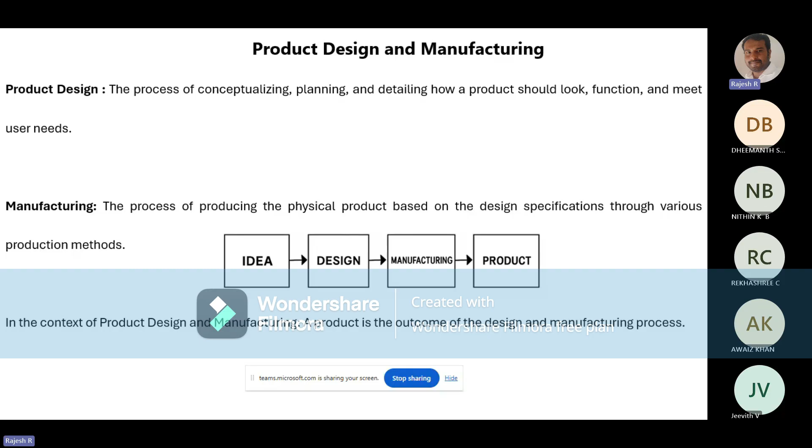One example I took was how the evolution of product design took place. Initially, the product design era started with the craft-based era, where parts were made by hand by skilled artisans. So design and production were integrated. Customization was high, but scalability was low. There were some constraints or disadvantages in the craft-based era, due to which the emergence of the engineering design era took place, after the post-industrial revolution.

In the engineering design era, a separation of design and manufacturing processes developed, with the introduction of standardization and interchangeable parts. Design became systematic, involving calculations, drawings, and specifications, and there was a rise of engineering disciplines, where different departments came into picture.

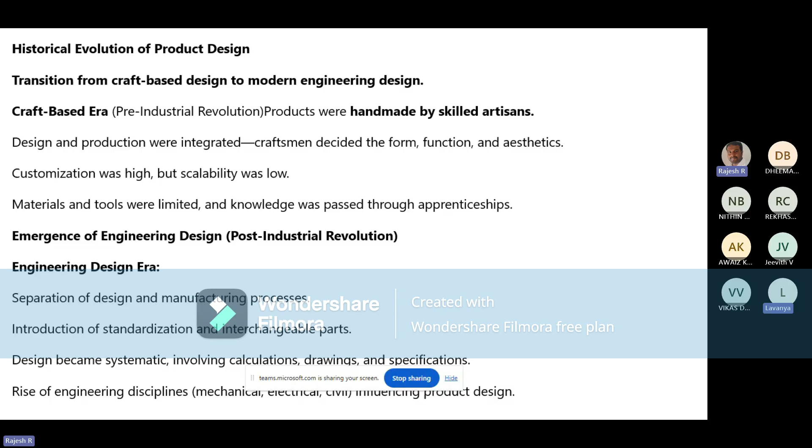I took an example of a handmade wooden chair for the craft-based system, where the artisan usually designs and prepares the parts himself, so a combination of design and manufacturing is present in this craft-based era.

Whereas when it comes to the engineering design era, you can come across different departments, like the designing department being separate from the production department. In the designing department, only the conceptualization of the part, how it has to be designed, and the detailed design of the part, what features should be there, all those things are focused on in the designing stage.

I gave an example of a smartphone, where it is designed and its specifications are represented, like screen size, battery capacity, camera specification, and all the detailed drawings come into picture in the designing stage. Whereas in the production stage, the components that come into picture, like material selection, are considered.

Material selection plays a very important role. There are different parts, like the body part, which needs to be prepared using aluminum material, and the glass cannot be prepared using metal, right? So a glass screen cannot be prepared with metal parts, so glass will be chosen as the material.

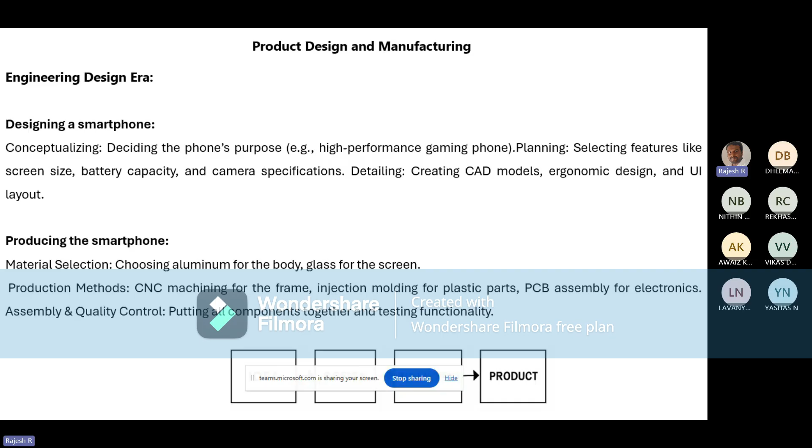So material selection plays a very important role, along with the different production methods that have to be followed in preparing different parts, like CNC machining being utilized for the frames, injection molding being used for plastic parts, and other things coming into picture, followed by assembly and quality control in the production of the parts. So that is what I have shown here.

And the types of product design were discussed, like design by evolution being one type, and design by innovation being another type. So what is the difference between these two?

When we consider design by evolution, I gave an example of a bicycle, where you can notice the first picture indicates the starting development of the bicycle, which came into the market in the 1800s or 1900s. As we come to today's year, like 2020 or 2026, most of the features remain the same: the wheels, spokes, the seating arrangement, the handles.

Only slight changes in aesthetics can be noticed in this upgraded version of the bicycle. So that is what we call design by evolution, where gradual improvement of an existing design comes into picture. As I've shown with the bicycle example, gradual improvement has taken place, rather than a sudden innovation.

So when it comes to design by innovation, I gave an example of two processes called subtractive manufacturing and additive manufacturing. In design by innovation, the design of the part refers to creating a completely new design approach based on scientific discoveries or advanced technology, rather than improving an existing design—meaning the technique you focus on is completely different. The best example of this is 3D printing, which I have shown here.

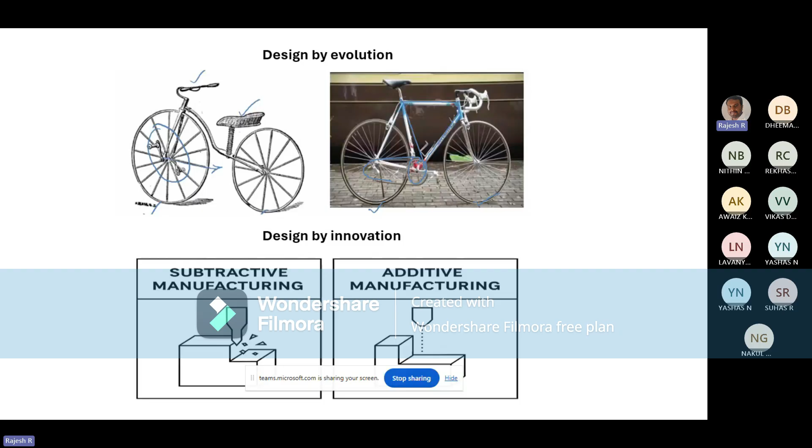Whatever parts are going to be manufactured, it's a completely different process. Additive manufacturing is where the parts are built layer by layer, whereas in subtractive manufacturing, a complete raw block is taken and the excess material is removed. So it is a subtractive manufacturing process. A changeover has taken place completely from subtractive manufacturing to additive manufacturing, and this is what we call a complete innovation way of design.

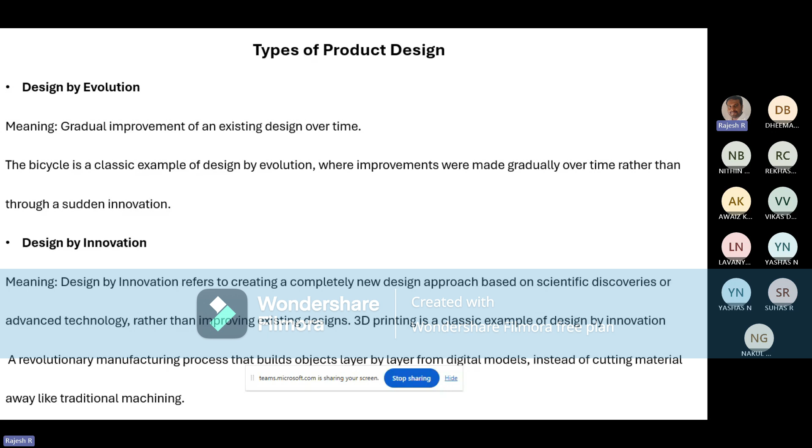These are the two types of product design which we discussed in the last class, and also we discussed about the production consumption cycle. Whatever product you are going to prepare follows a production consumption cycle. The important thing to focus on is the four steps: production, distribution, consumption, and the recovery stage. Whatever product you consider, it follows these four stages.

Production means creating the goods or service using raw material, energy, and labor. For example, a manufacturing car factory where using steel, electronics, and assembly process, the complete car will be manufactured. After the manufacturing process, the product needs to be sold, so a distribution process comes into picture, where the parts or cars that have been prepared need to be transported from one place to another and delivered to the consumers.

Shipping cars from factories to dealerships is one of the steps. After the cars have been sent to the dealerships, the dealers sell the goods to the end customers. The end user is the common people who buy the car, so that is the consumption stage. And the last one is the recovery stage - after the product has been utilized completely, it has to be scrapped.

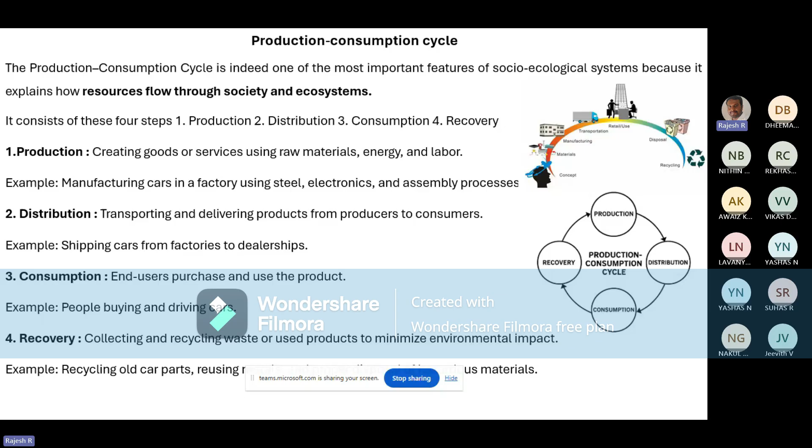Whatever collecting and recycling of waste we do, we call it the recovery stage, where the products will be recycled so that it does not affect environmental conditions. That is what I have given here: recycling old car parts and other things.

Different categories of information are used in the production consumption cycle. Information plays a very important factor in the production consumption cycle, because it flows in all the different stages of production, distribution, consumption, and recovery. If you consider the production stage, you require information - what type of information is required? It is technical and specification information.

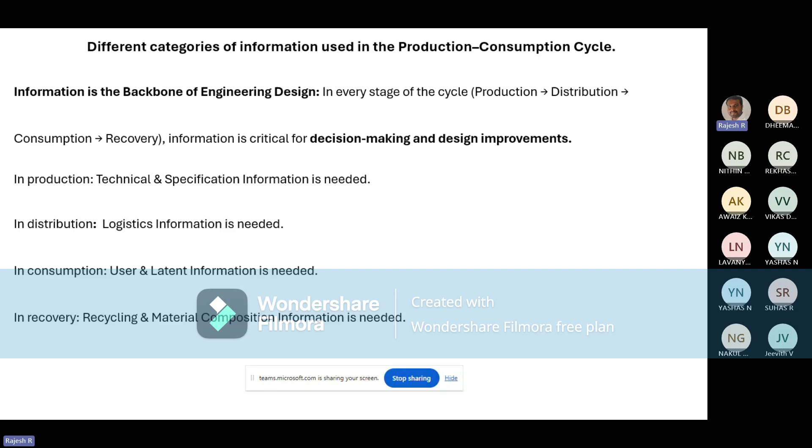When it comes to distribution, logistic information is required. In consumption, user and latent information is needed. And in recovery, recycling and material composition information is needed. So we will go one by one.

In the production stage, you require technical and specification information. During this stage, engineers depend on detailed information of the material, components, and environmental conditions to ensure the product can be manufactured correctly. When it comes to specification information, what type of material you're going to use, whether machinability can be done using those materials, the process parameters need to be selected so that whatever parts you prepare will be performed safely and efficiently.

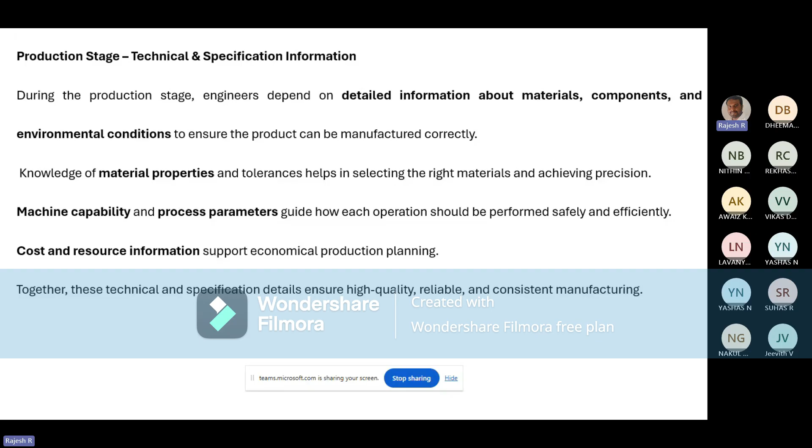Cost and resources information also plays an important role in the production stage. Together, all this technical and specification information yields high quality, reliable, and consistent manufacturing. When it comes to the distribution stage, logistics information is needed.

During the distribution stage, companies rely on logistic information such as demand levels, transportation routes, distances, and warehouse conditions. Demand levels are very important because they give a clear picture of what components need to be manufactured, what demand the customer is expecting for a particular time period, and how much product the company needs to develop.

Based upon the demand level information, the company starts developing the product. Information on transport capacity and scheduling follows, because whatever components or products come out from the factory need to be transported. What capacity, how many vehicles need to be arranged, so that efficient planning and cost reduction takes place. Accurate inventory and storage data helps prevent delays, shortages, and excess stock.

Whatever inventories and necessary raw materials are required to prepare the product will be stored in a particular place so that no delays and no shortages happen. If you have brought more inventories, that leads to excess stocks, which will damage the company and cause loss because storage capacity and maintenance will be increased, adding to indirect cost where the company will be in loss. Due to this, all logistic information needs to be recorded and timely managed.

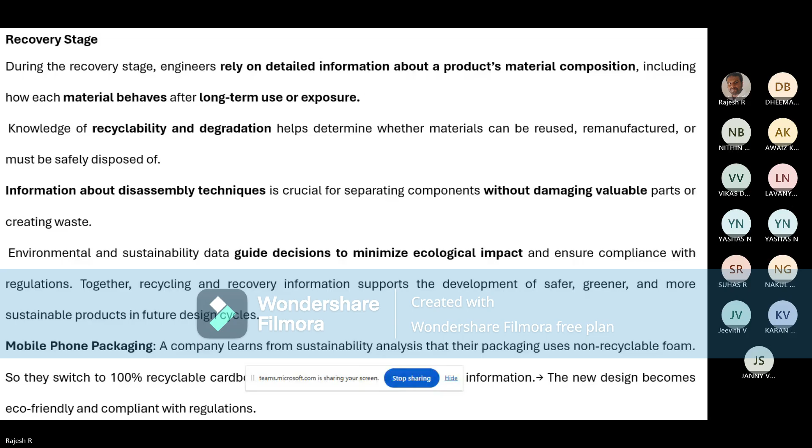Whatever product comes into the market can come in three ways. One is creating a new product, a completely new product coming into the market. The engineer may start from scratch to design; his role is to design the process, starting from scratch to design a completely new product that never existed before.

For example, designing a new drone model for delivery services. This is a completely new concept or new product that the designer develops.

Another way is adapting an existing product for a new application. Sometimes an existing product is modified or adjusted so it can be used in a different situation or industry. For example, using a vehicle engine design and adapting it for a generator setup, where the engine utilized in the previous product is taken and utilized for the generator setup. This comes under adapting an existing product for a new application.

The third one is improving an existing product.

Whatever product is already there, you are going to improve it by refining its parameters or specifications, so the betterment of the product will be developed, making it safer, cheaper, or easier to use. Example: updating a smartphone camera or increasing the battery life. So whatever the phone is there, you're going to improve its parameters, like the battery life or the camera. All these things will be considered in the design process.

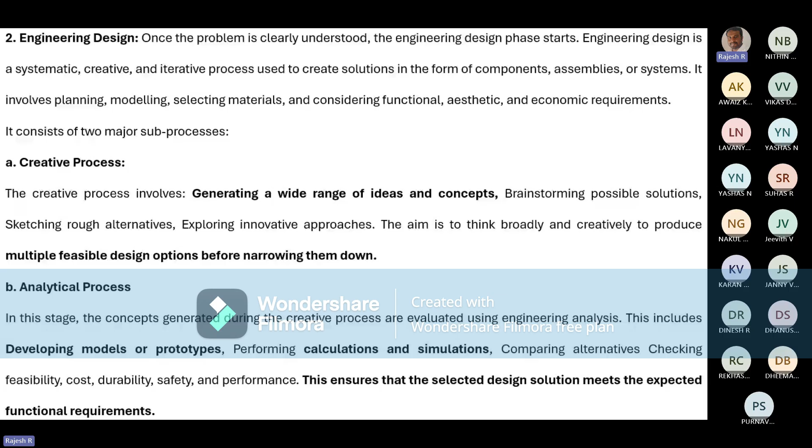How it will be analyzed? By preparing one prototype and performing some calculations and simulations on that, you're going to say that yes, this design meets its standards, and then finally check the product before manufacturing. The prototype which you have manufactured will be checked.

One example I've given here is a portable Bluetooth speaker. While traveling or during a small gathering, a portable Bluetooth speaker allows the user to play music loudly and clearly without carrying a large audio system.

After the creative process and analytical process, the ultimate check is performed. What is the ultimate check? It means performance requirements: does the speaker deliver the expected sound output? Is the Bluetooth range at least 10 meters without interruption? Does the device meet electrical safety standards? Does the charging port function properly with standard chargers? All these are the specifications checked practically when the product is being prepared.

If all conditions are satisfied, approval is given for manufacturing mass numbers of products that will be released to the market. If it fails in any one criteria, the design must be modified and retested until all requirements are satisfied.

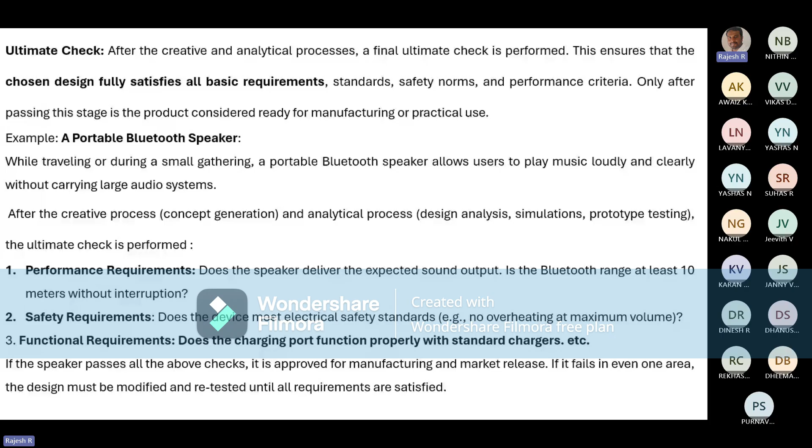So these are all the stages considered in the product design realization process. Product realization process adds the manufacturing stage as well as the logistics, where the product will be delivered to the customer place. So these two extra things are added in the product realization process, which come under it apart from the product design realization process.

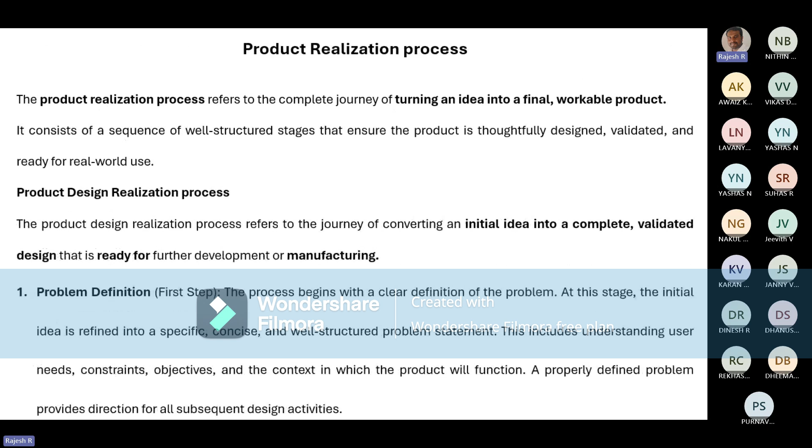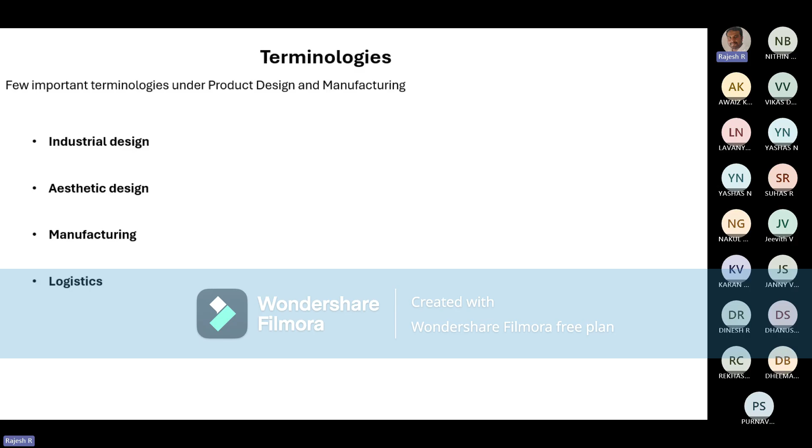Some terminologies you need to understand in product design and manufacturing here are industrial design, aesthetic design, manufacturing, and logistics. So what do you mean by industrial design? What is its importance? Industrial design mainly focuses on the form and function of a product.

Form is the visual appearance, and function is how the performance of the product is considered. So industrial design concentrates on both the visual appearance, the aesthetic look, as well as the functionality of the product. Its main purpose is to enhance user satisfaction and create a strong connection between the product and the user.

Industrial design works around the technical part designed by the engineer and makes sure that the shape, form, and usability fit properly with the technical system. In engineering design, whatever technical performance the product needs to perform is prepared. The industrial designer works on top of whatever engineering design has been prepared.

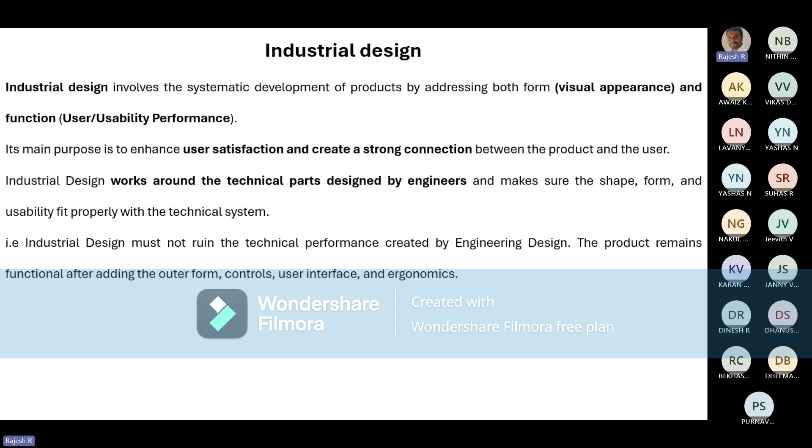For example, an electrical kettle is one such product. Engineering design comes into picture first, considering the technical performance. He tests the technical performance, that is the functionality of the kettle he will carry out.

He focuses on how fast the water heats, the efficiency of the heating element, thermal insulation to prevent heat loss, safety cutoff when water boils, durability of internal components, and energy consumption. This performance is scientific, measurable, and technical. All these things are considered in engineering design.

For industrial design, he focuses on how the kettle works for the user in daily life, meaning the easy way the user can use the kettle, by giving a comfortable handle grip. So it's an extra addition. You initially develop the heater to boil water, but for daily use, the user needs a handle with a comfortable grip so he can easily and comfortably lift the kettle and use it.

He can pour the water and easily use a proper on and off switch, so that when the water heats, you just switch off, and if you need to start, you just switch on. That flexibility for easy usage of the product comes under industrial design.

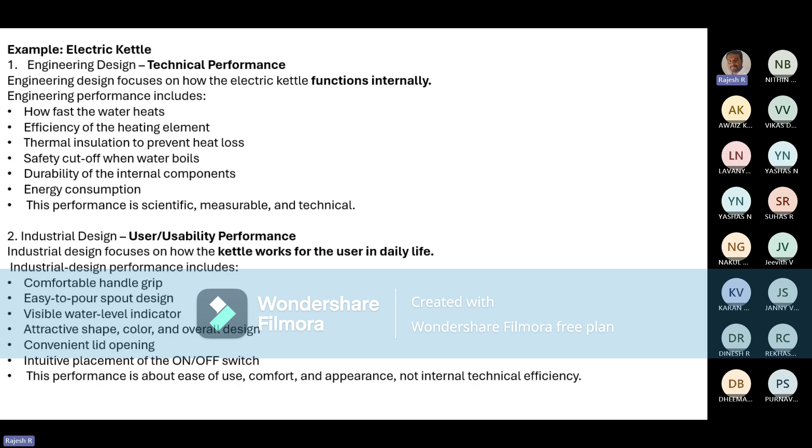Easy and convenient lid opening, intuitive placement of the on and off switch. So this performance is about ease of use, comfort, and appearance, not internal technical efficiency. These are the two things you need to understand the difference between engineering design and industrial design. Aesthetic design is part of industrial design, mainly focusing on the beautification of the product.

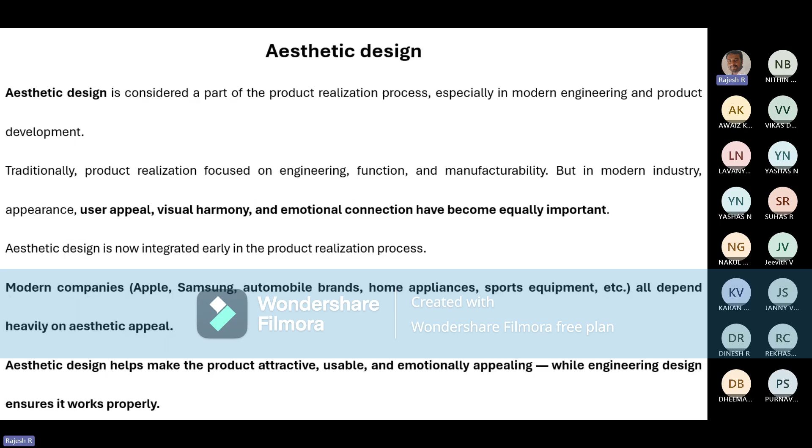Modern companies like Apple, Samsung, automobile brands, home appliances, and sports equipment are heavily depending on aesthetic appeal, because it makes the product attractive, usable, and emotionally appealing, so the customer will buy the product more and more.

Manufacturing converts raw material into a finished product that will be ready for use. Examples: converting steel into a car body, turning plastic pellets into a bottle, assembling parts into a smartphone. All these things come under manufacturing.

Logistics deals with the movement and positioning of resources at the right place and the right time. It includes planning and acquiring material, storage and warehousing, distribution of goods from one place to another, movement of information, energy and personnel, and delivery of products from factory to customer. All these things come into picture.

The product realization process is completely a broader one, so it can be called the product development cycle. What are the stages that come into picture? The idea will be there, and to that idea, the problem definition will pitch in, because due to some concept, whatever the concept, what is the need?

Usually the need of the customer - based upon that, a problem will be defined. Then the design team will work on the conceptual design and get one particular design which is feasible for the manufacturing process, and the design will be tested by a prototype which is manufactured, with simulation carried out and tested.

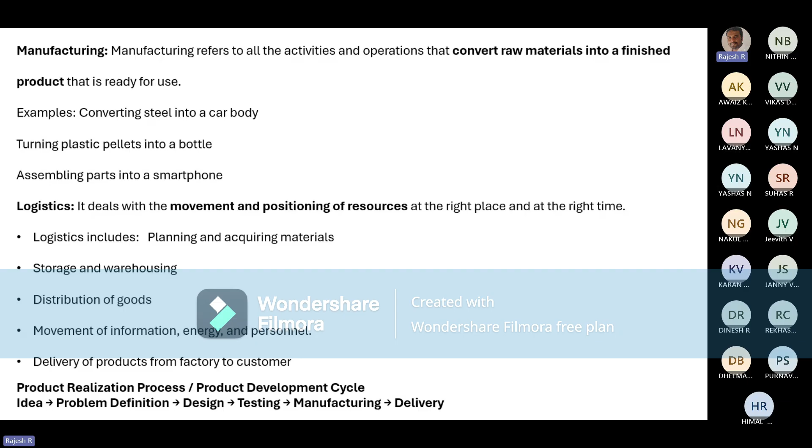The features of effective product development: when you say the product that has been developed is effective, it is categorized based on product quality, product cost, and product development time. These are some of the features of effective product development.

Product quality describes whether the goods being prepared meet customer expectations. High quality product increases customer satisfaction, market share, and the price customers are willing to pay. Product quality check is done by checking whether the product is reliable - can the customer trust the product? A reliable product reduces complaints and increases trust.

Whatever product is prepared should be of high quality. High quality means you meet customer expectations, the market share increases, the price of the product increases, and the company gets profit. If the quality is not good, the product won't survive in the market, and a huge loss is expected for the company.

Product cost refers to the amount of money required to manufacture the product. It includes material cost, labor cost, manufacturing expenses, testing cost, and overhead cost, because cost decides the selling price that needs to be kept for the product. The profit earned per product depends on the cost kept for that product, whether the company can compete in the market, and how much money can be gained at a particular sales volume.

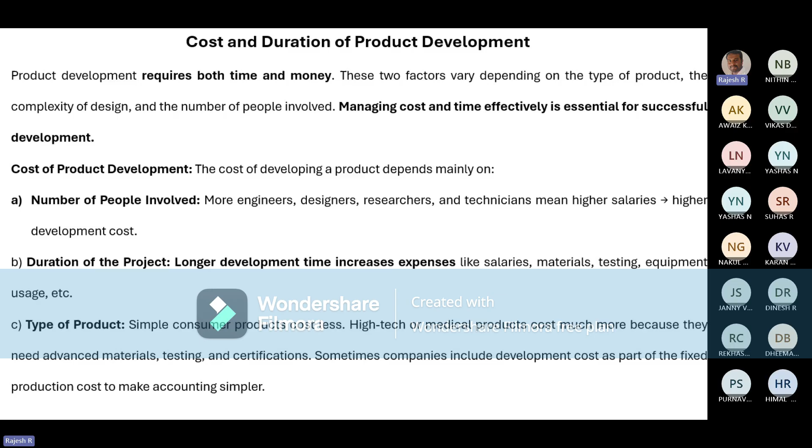If it's a simple project, the time required will be less. If it's a longer duration project, the cost will be high. So a trade-off has to be made between cost and time duration, considering direct cost and indirect cost. The optimum duration in which the product is built plays a very important role - this is the best time to complete the project when the total cost is minimum.

So what is the total cost? It's nothing but the indirect cost plus the direct cost. Direct cost includes salaries of engineers, designers, technicians, testing, etc. If you complete the project very quickly, you need more manpower, overtime, rapid prototyping - high direct cost. If the project takes longer, the workload spreads out and direct cost decreases.

What do you mean by indirect cost? It's nothing but delay in market entry, loss of sales opportunities, overheads, management cost, inflation in material cost. If the project takes too long, this indirect cost rises. All these parameters need to be considered to get the best product over time - the optimal duration has to be properly chosen, and the product needs to be prepared and sold in the market.

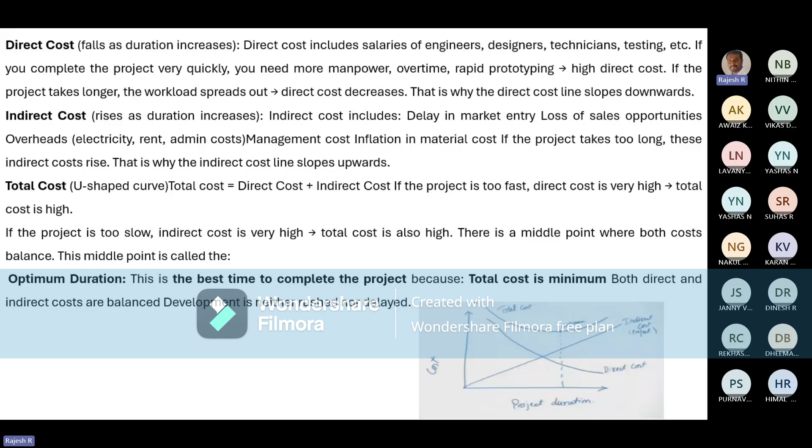So what are the major concerns in product development? The trade-off, as I was speaking about, means choosing the best desirable features between two or more multiple features that are available. If you choose one, another parameter will get worsened. So that trade-off has to be thought of by a design engineer, with recognizing, evaluating and all those things carried out to choose the most desirable features in a product, because all features cannot be at the ultimate level.

Some features need to be improved, and some have to be kept at a middle version, and it has to be managed - that trade-off has to be played in a safer zone. Example: making an airplane lighter reduces fuel consumption and improves performance, but using lighter material increases manufacturing costs. These parameters need to be chosen in a better way so that the product you develop meets the required standards.

Another concern is dynamics. The product must be designed to adapt to continuous changes in technologies, market trends, competitors, and customer preference. Whatever product you release into the market, continuous changes in technology will happen. If you develop a product which is outdated, what is the use? So the dynamic nature needs to be analyzed, and the product needs to be developed and sent to the market for successful product sales.

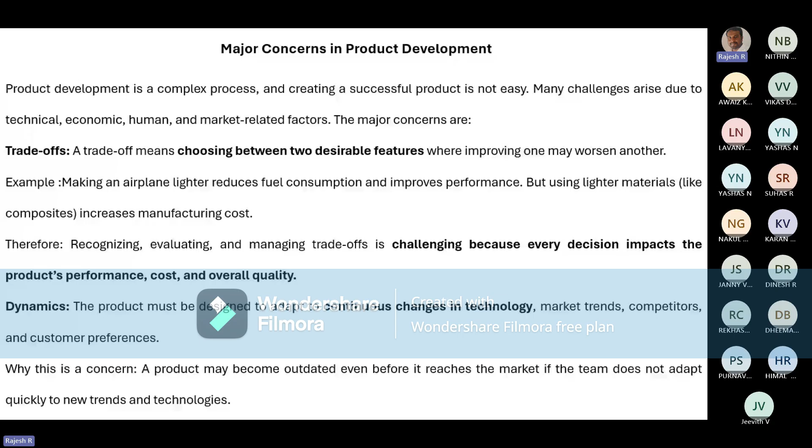So trade-off dynamics, time pressure, economics, satisfaction of societal and individual needs, team diversity, and team spirit all come into picture in the process of product development. Now some important concepts connected with the process of product development.

One is capital circulation or the production turn. There are a number of things listed here: capital circulation or production turn, manufacturing capability, mass production, interchangeability, product life cycle, the S-curve of the technology growth cycle, simultaneous or concurrent engineering, design for X, and engineering problem solving process. All these terms are interlinked in the product development process.

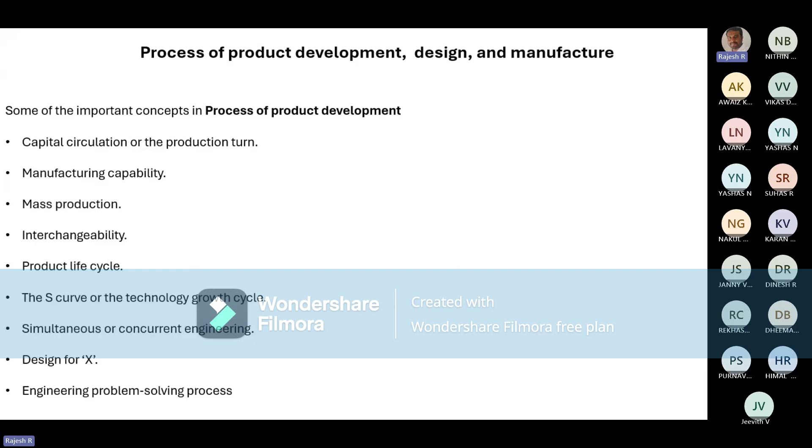First we will discuss capital circulation or the production turn. What do you mean by capital circulation? It describes the complete cycle of money flowing in a manufacturing enterprise, from initial investment to profit generation and reinvestment. It explains how capital is put into production, converted into products, sold in the market, and returned as revenue.

The household includes people who own land, laborers, workers, and customers. They provide the market for the factors of production. For a factory to run, they require some space and capital investment. So some people give loans, some work as laborers, some give land, and all these things are taken up by the firms. The firms buy these factors.

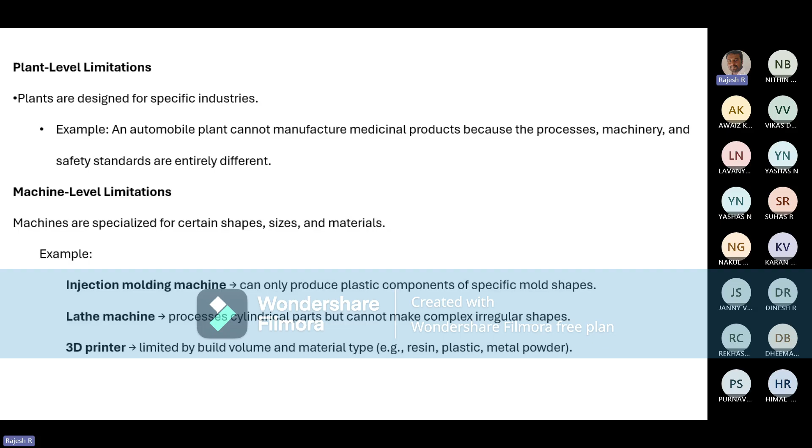Machine level limitation means machines are specialized for certain shapes, sizes, and materials. For example, an injection molding machine can only produce a plastic component of a specific mold shape - it cannot produce other shapes of bottles. These are some of the limitations that come under the manufacturing unit.

The capability has to be initially considered, and then whatever orders come into the company have to be evaluated - only if the company can process those orders should they move forward with preparing the products. Otherwise, the company cannot manage the order, and it may end up delaying the product to the market.

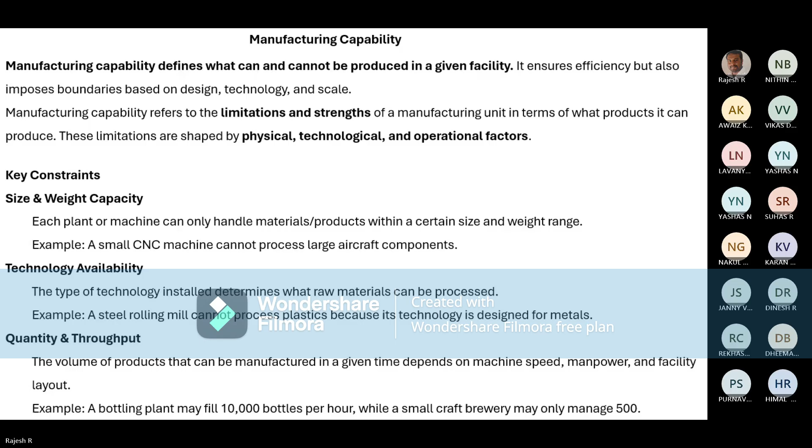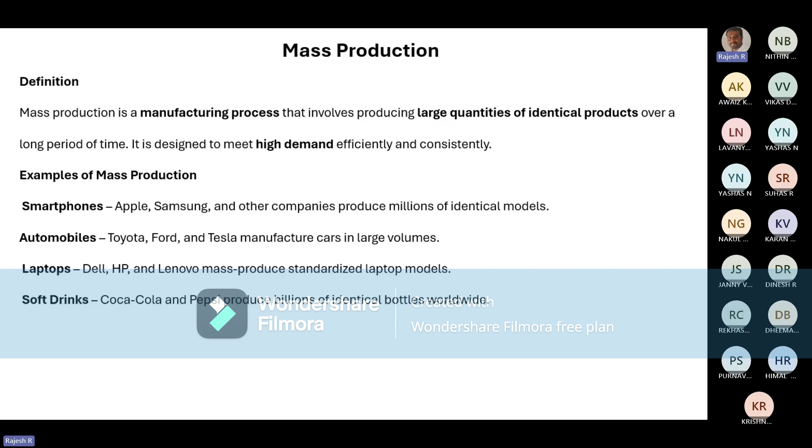Mass production is a manufacturing process that involves producing large quantities of identical products over a long period of time, designed to meet high demand efficiently and consistently. Examples include smartphones, automobiles, laptops, and soft drinks. The main features are larger volume production, with a single product or very few variations produced, running continuously for months or even years.

High demand - mass production is economical only when there is consistent and high market demand. Only when there is high demand in the market can you go with mass production. For 10 to 50 components, you cannot go for mass production. When there is more demand, like thousands or lakhs of components that need to be manufactured, only then does the mass production concept get taken up by the company.

A dedicated manufacturing plant is specially designed for one product, with special purpose machines, automated assembly lines, conveyors, and transfer systems - all focused on dedicated manufacturing. One specific product, with maybe one, two, or three slight variations, is produced, and the plant usually focuses on mass production and standardization.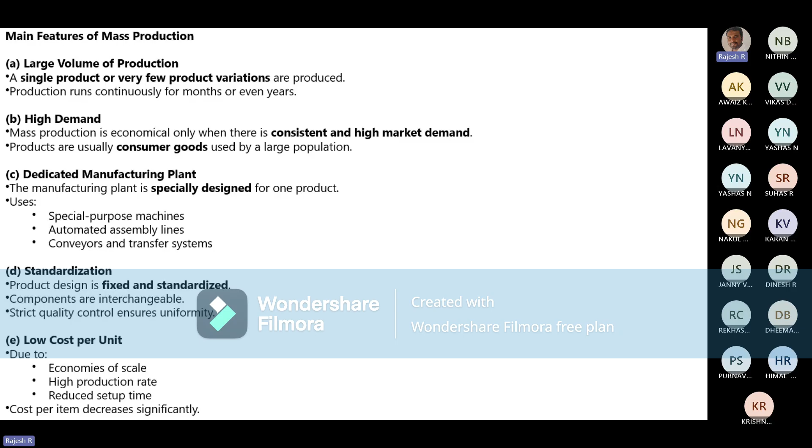Whatever product is being developed will be fixed and standardized - components are interchangeable, and strict quality control ensures uniformity. All this is an added advantage for mass production, including low cost per unit, due to economies of scale, high production rate, and reduced setup time - all of which lead to a decrease in cost per item developed in mass production.

Interchangeability is the process of ensuring that manufacturing parts are produced within specific tolerance limits, so that any part can replace another without requiring additional fitting or adjustments. It is a cornerstone of modern manufacturing, enabling mass production, easy repairs, and cost efficiency.

Mass production mainly depends upon the parts being manufactured in the way of interchangeability, so whatever product you manufacture can be easily replaceable. All parts of the same type are made to identical specifications. For example, every bolt of certain size M8 into 1.25 fits into any matching nut. So if a nut or bolt, which is a standardized part, gets damaged, it can easily be replaced by another part of the same standard size. This makes interchangeability easy, and the product can be easily assembled as well as disassembled, and can be user friendly. That is the main intention of interchangeability.

Tolerance control means variations in size are minimized and kept within acceptable limits. A shaft diameter may be specified as 20 mm plus or minus 0.05 mm. Any shaft within this range will fit into the bearing. So that specification needs to be controlled in mass production, and then only this interchangeability concept will be implemented.

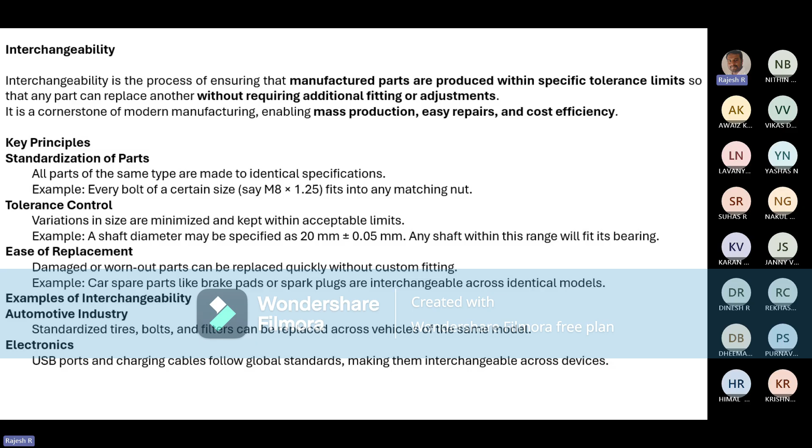Ease of replacement means damaged or worn parts can be replaced quickly without custom fitting. Car spare parts like brake pads or spark plugs are interchangeable across identical models. In automotive industries, standard tires, bolts, and filters can be easily replaced across vehicles of the same models. These are some of the importance of interchangeability.

When it comes to the product life cycle, what is a product life cycle? It is the initial stage to the end of the product, where the product completely declines and no sales take place. From the starting stage to the end stage, we call it the product life cycle. It is the time span between the conception of a product and the point at which it is no longer profitable to manufacture or sell. It describes how a product moves through different stages in the market, and there are different stages that come into picture when you consider any product.

It follows these stages where the product is introduced into the market, that is the launching of the product. There is heavy investment in marketing and promotion, and sales are initially low but start to rise as awareness grows. For example, a new smartphone entering the market initially gets some attention; after launch, heavy marketing and promotion is carried out and initially sales are low. Then afterwards, due to marketing and promotions, a gradual increase in sales takes place.

That is called the growth stage, where customers become familiar with the product. Sales increase rapidly, profits rise due to economies of scale, and competitors may enter the market. For example, electric vehicles gaining popularity and adoption - day by day the popularity and growth rate of electric vehicles has been increasing.

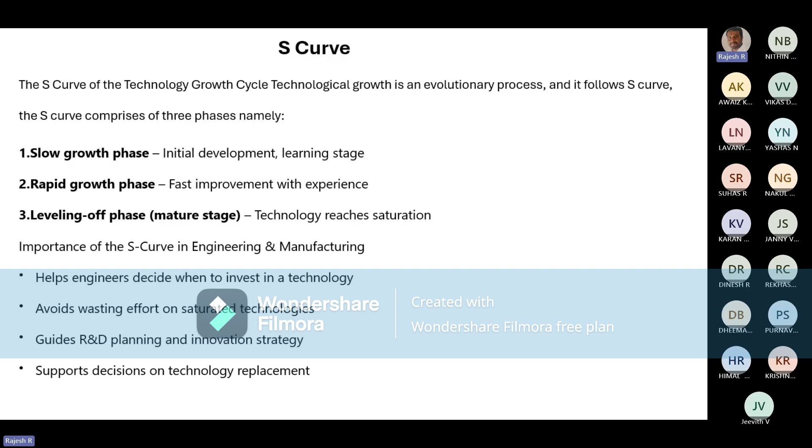So avoid wasting efforts on saturated technology. Instead of going with newer technology, if you go with a backward technology like the DVD player, it is a waste of money and will lead to failure of the product. It guides R&D planning and innovation strategy, and supports decisions on technology replacement. All these things are helped by going through the S curve of any product.

So design for manufacturing - what do you mean by it? It is a systematic approach in product development in which a product is designed so that it can be manufactured easily, economically, and efficiently while still meeting functional, quality, and customer requirements. Design for manufacturing is a core element of concurrent engineering, where design, manufacturing, quality, cost, and assembly considerations are addressed simultaneously during the design stage.

That means whatever stages we've discussed - the design stage, the manufacturing stage, quality check, cost estimation - all form separate stages. But in concurrent engineering, the design for manufacturing process, all these stages are simultaneously considered in preparing the product. If manufacturing issues are not considered during the design stage, it leads to high cost of the product.

So design changes become very expensive, quality problems arise, production delays occur, and due to this the cost of the product becomes high. All these things are interconnected. Because of this interconnection, the design stage plays a very important role where it considers all the steps like manufacturing, quality, and cost simultaneously. That is what we call concurrent engineering.

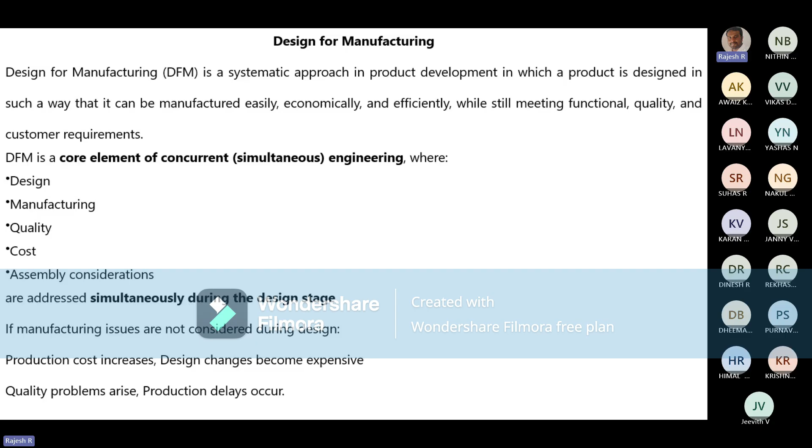The major activities included in design for manufacturing are: understanding market and user expectation, selecting appropriate design principles and concepts, identifying suitable material and manufacturing process, design analysis and rectifications, meeting quality expectations, analysis of assembly and disassembly, development of engineering models and detailed designs, economic analysis and production cost estimation, prototype development, engineering testing and redesign, design feasibility analysis, production planning, and control of production and distribution activities. All these points and activities are considered in design for manufacturing.

As the name itself indicates, design for manufacturing - before manufacturing, a thorough design process has to be focused on the product, so that whatever product you are going to manufacture will be suitable to launch into the market with a higher success rate. To get the product to have a higher success rate, the design for manufacturing principles need to be followed, and whatever product follows these principles, 90 to 95% of products will succeed in the market. That is what the principle mainly focuses on.

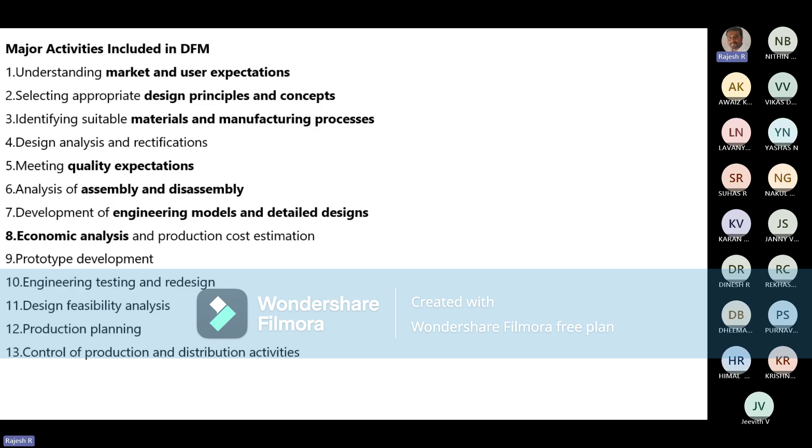So without DFM, what happens? You end up with complex geometry, tight tolerances everywhere, special tooling arrangements needed for preparing components, and high production cost. These are some of the major concerns when you are not following the design for manufacturing principles.

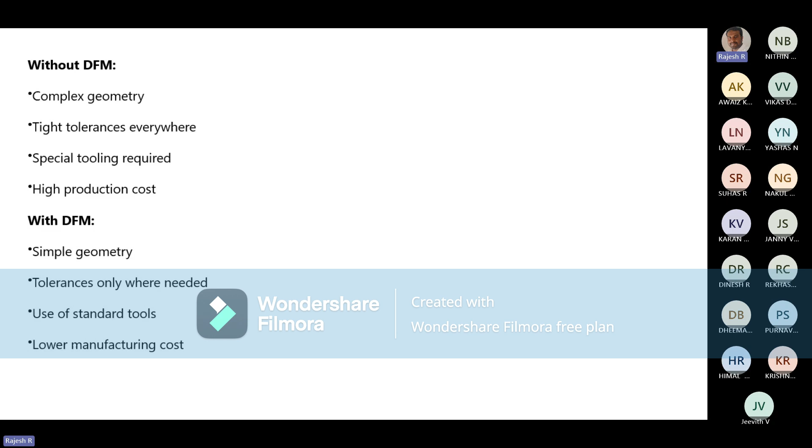When you do follow it, the geometry you prepare becomes simple. The tolerances, wherever required, you give accordingly, and the design is safer for its functionality. Use of standard tools is sufficient to prepare the parts, and lower manufacturing cost will be the outcome of following this technology.

The engineering problem solving process is a systematic and logical approach used by engineers to identify, analyze, and solve technical problems efficiently while considering technical, economical, and practical constraints. A widely accepted model describes this process in five main stages.

So when it comes to the engineering problem solving process, it has been categorized into five main steps: formulate the problem, analyze the problem, search for alternative solutions, decide among alternative solutions, and specify and implement the solution. These are the five major steps of the accepted model of the engineering problem solving process.

So what does formulate the problem indicate? It clearly identifies and defines the problem, its objectives and constraints, like cost, time, safety, and standards, all considered in the first stage.

The second one is analyze the problem, where you collect and study relevant data, understand causes, and break down the problem into manageable parts.

Search for alternative solutions means you generate multiple possible solutions using engineering principles, experience, and brainstorming. Then, decide among alternative solutions, where you evaluate each option based on feasibility, cost, reliability, and performance, and select the best one.

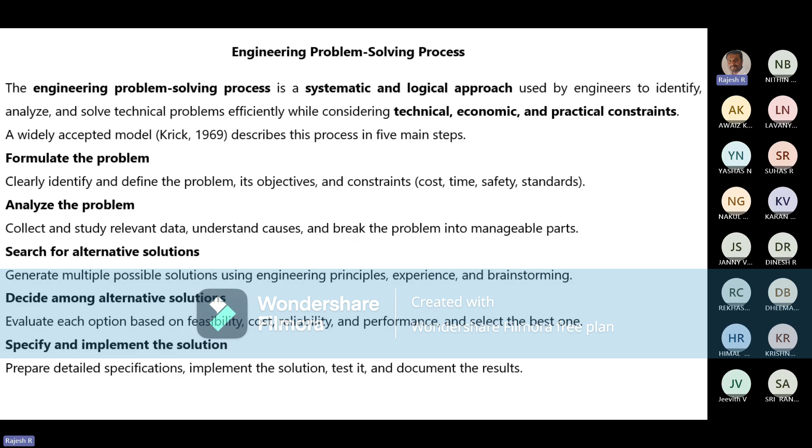Specify and implement the solution: prepare the detailed specification, implement the solution, test it, and document the result. So how do you solve an engineering problem? What is the process involved? Whatever problem you've taken, what are the stepwise ways it will be handled - these five steps have been clearly identified.

For example, high rejection rate of machined shafts due to diameter variation. This is one example I have taken. Due to the diameter variation, a high rejection rate of the particular shaft is happening.

So you formulate the problem. What to do? Clearly define the problem and constraints. The problem: shaft diameter goes out of tolerance, causing rejection. That's the problem you have formulated. The constraints: existing CNC machine, limited budget, delivery deadlines. Based upon this, the output is the high rejection rate of machine shaft due to diameter variation.

Next, you analyze the problem. What to do? Collect the data and identify the root causes. For example:

Measure the rejected parts - first take the rejected parts and measure them. Variation increases after long runs, meaning when a number of parts are prepared on that CNC machine, diameter variation occurs after some time period, and the products are being rejected.

Check the machine - whether tool wear is happening, any vibration is occurring - that review process needs to be followed by checking if cutting parameters are unchanged for long periods. That is a major reason: the cutting parameters, whatever tool you're using, remain unchanged for long periods, causing tool wear and vibration. That is the root cause of why the part is being rejected.

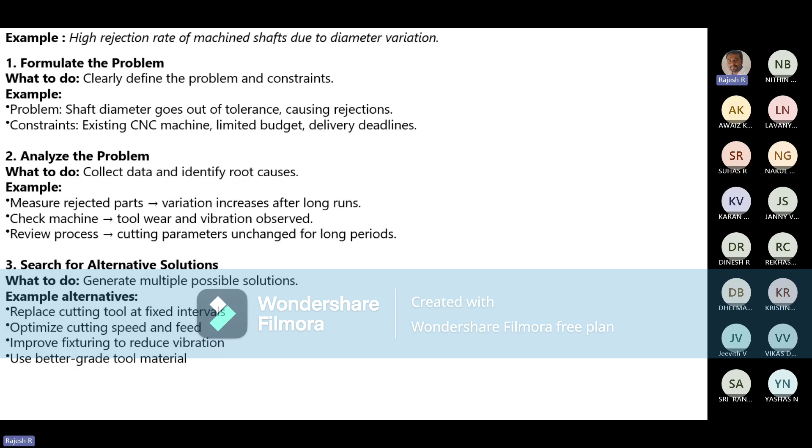Optimize cutting speed and feed. Improve fixturing to reduce vibrations. Use better grade tool materials. These are some of the alternative solutions to achieve a lower rejection rate of the machine shaft.

Then decide among alternative solutions - you need to choose which one should be given more importance. Tool replacement plus parameter optimization is chosen: low cost, quick implementation, and effective reduction in variation result from these two decisions. Instead of replacing the whole CNC machine with a new one, which takes more cost and time, the immediate decision is tool replacement and tuning up the chosen parameters, such as feed speed.

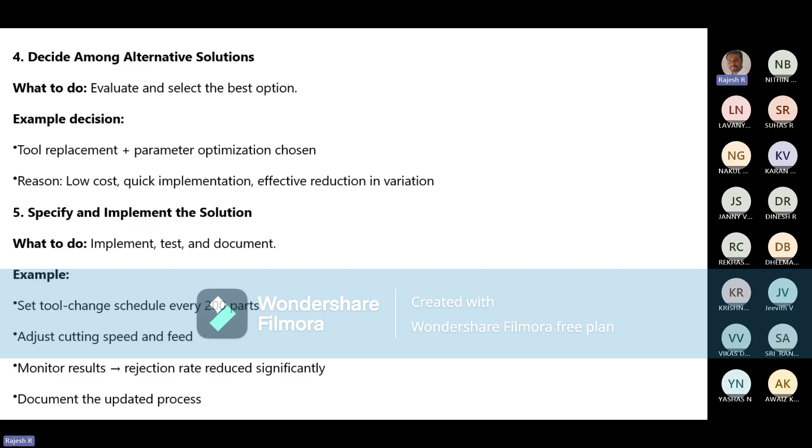You tune it up and prepare the component - specify and implement the solution: implement, test, and document. Set a tool change schedule every 200 parts, adjust cutting speed and feed, monitor the results. The final result is a reduced rejection rate, which is documented and the process is updated.